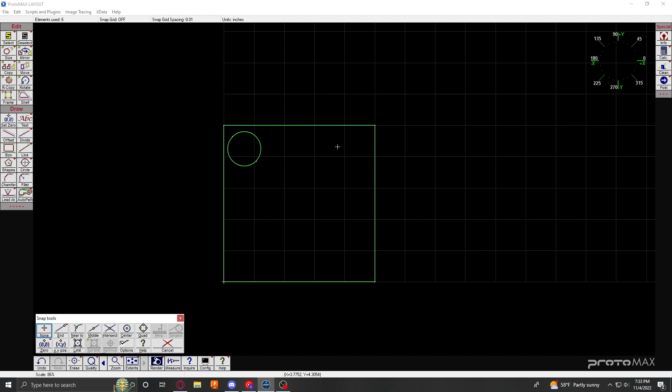How about 4? Okay, cool. Well, that's ugly, not very much use to us, especially in the field. These two circles aren't even inside the square. Let's get rid of those and do this the right way.

To get our circles actually centered where we want, if we want a square hole pattern, we need to create reference geometry. So I'm going to create another square in open space, drawing it here.

I pressed B on the keyboard for the box tool. I'm going to click and create a box that I want to be 4 by 4, so our circle pattern ends up being 4x4.

To get those circles, I'm going to click on the circle tool, and click end to snap the center of that circle to this corner. We're going to draw this for, let's say, 3/8 hardware.

So let's upsize it to 0.4, so there's a little bit of leeway. The decimal equivalent of 3/8 fractional to decimal is 0.375, but we're going to upsize it for leeway.

If you're using a plasma cutter, you need to upsize it anyway. It cuts a little off dimensions, and sometimes the holes aren't exactly circular, so upsize a little. If you're using a laser cutter, do this anyway so you have a little play, since the washer will cover the hole. Upsize to 0.4 or 0.45, or if using 1/2 inch hardware, cut at 0.55, whatever you want. For now, let's do 0.4.

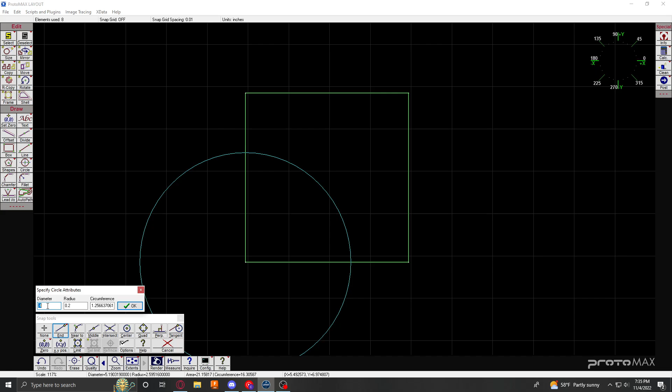So we set that diameter in there. We're going to hit OK, and we've got that there.

For the rest of these, I'm going to use keyboard tools and watch how fast it goes if you're not clicking. I'll hit C, then E, then click, then hit enter. The program remembers the last diameter or radius I used, so it set all of these to 0.4.

To verify that, we can inquire on one of the arcs, and we get our diameter of 0.4. It ends up being 0.39 repeating - not sure why it shows up like that. Close enough, good enough for the girls I hang out with.

How do we get this square into there? Well, it's simple. We're going to create reference geometry.

We're going to get into the line tool now. It works the same way as the box tool - you click it, click two different points in space, and it creates a line. Very cool, very dandy, but not good enough.

We need to create a line at the middle of this to the middle of the other side, to intersect this square directly in half, essentially.

We're going to do the same thing here, but using the keyboard shortcuts L then M to tell the program I want to start a line from the middle of this line. Let's do perpendicular - we'll do a line perpendicular referencing this line, and we get the same result.

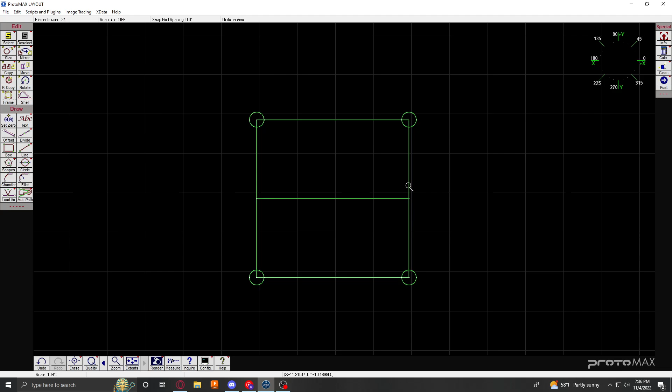Now we're going to use the select tool. We'll click it for now, right click this one, and select the window tool. We're going to create a window using 2 points - click there, click here. We've selected everything here.

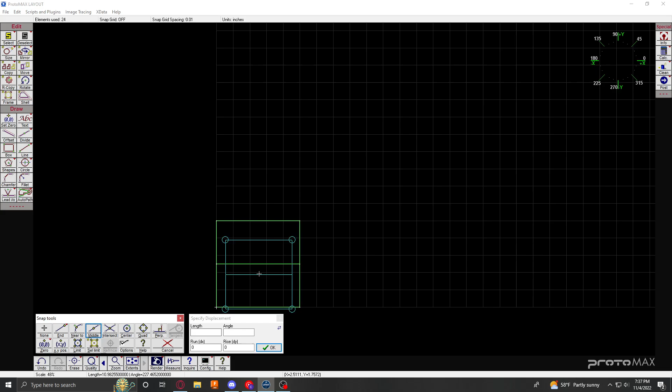We'll use the move tool over here on the left. We're going to move using the same snap tools from the middle of this line to the middle of the other reference geometry line we created. We'll click, and it drops it.

All we have to do now is get rid of all of this reference geometry. To do that, we're going to press E on the keyboard, which changes the cursor to the erase tool, and it starts deleting everything we don't want, since we don't want any reference geometry in the final base plate.

And there we go. We still have our holes selected. We need to unselect those so we don't accidentally delete them in the future.

To do that, we're going to right click the deselect tool and deselect all. Or alternatively, we could just click it to get the deselect cursor - you can see the little minus sign next to the cursor, meaning we're about to deselect everything we click.

This is a time consuming and kind of clunky way to actually deselect everything. So if I want to reselect everything I had, select all. I could deselect just the box by pressing D and C for deselecting connected, and deselect that, whatever. The deselect menu, when you right click on it, has so many different selections.

Same thing with the select tool—it's all the same, but you either select or deselect, whatever. So let's center back here, and we're home base.

Good to go. Let's fancy this bracket up a little bit. Let's get a fillet going on these corners, round them off a little bit. To do that, we'll click the fillet tool, or F on the keyboard brings us to that.

0.375 is about what we want, and the reason for that is it's contiguous with the diameter of the holes that we've set—we've set these for 3/8 hardware, and just to keep consistent, we'll do a 3/8 fillet on all of the corners. We could do 0.25 too. It doesn't really matter. Let's just do 0.25.

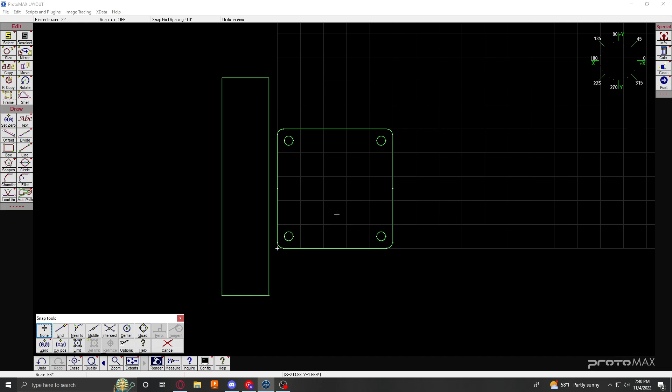If the fence post was right up against, right in the center, you'd have a hard time welding all the way around it. I know I would—I mean, depending on what it was. But this is an arbitrary situation that we're just creating for the sake of getting a little more explanation on how this program works.

So what we're going to do is offset the fence posts off of the edge here. We have an entity that's left over from when we drew that middle reference geometry line. We're actually going to use that to our advantage. We know that that line is in the exact center of the base plate even after we filleted it.

So let's just say we want an offset of 1.5 inches. To do that, we're going to draw a line by clicking L, or clicking line here, from the end of this entity. We get a dialog box to specify the dimensions of that line. Using the degree wheel here at the top, we know which degree measurement we need to input to get the line to go a certain direction. In this case, I know I want the line length to be 1.5 at 180 degrees to get it to go off to the left here. I'll hit OK, and it creates that line for me.

We're going to create another box. Let's just say we're using 1.5 tubing for our fence post. So we're going to create another box using the same constraints as before by typing in 1.5 and 1.5 for the width and the height.

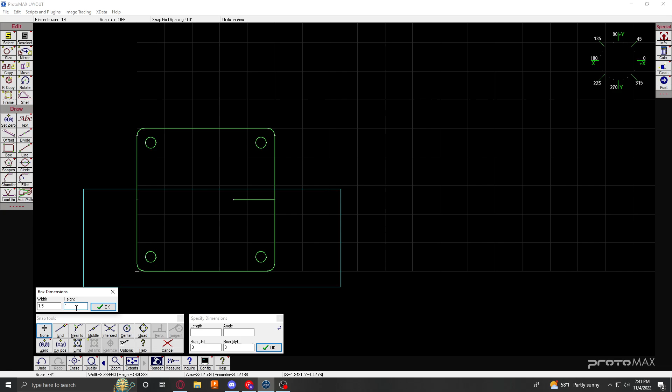Hit OK. Create our reference geometry here by L, M, click to get our line to be in the middle of this square. We're going to select everything by pressing S on the keyboard, W on the keyboard to get select window. Select everything here. Move—we'll just click it here—then select middle instead of putting it on the keyboard, and we'll hit End on the dialog box or E on the keyboard to get it to be on the end of that line. Delete our reference geometry, and now we have the placement here.

Now this makes it so there's no guessing where this fence base plate goes. You plunk it right into that hole, and it's perfect.

So now I'm quickly going to show off here. That took a while, but I'm going to show you guys how quick this can be when you're setting something like this up. I don't know how long it's going to take me, actually—I'm going to guess less than 30 seconds to draw everything just as I drew it. I say it's a show-off, but it's really just to show you guys how quick and easy this program is. So let's go through that real quick.

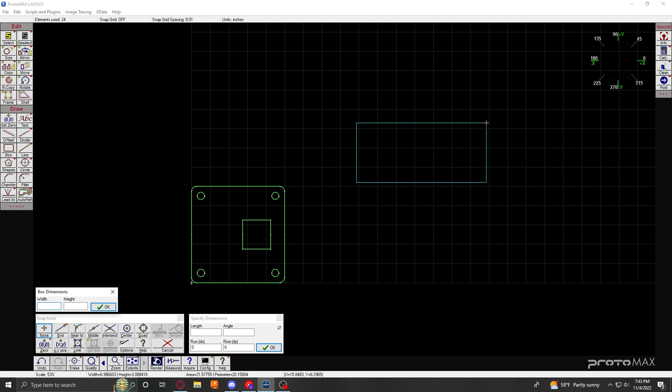Create box at 5, 5—there's that. I'm going to draw another box that is 4, 4. Circles at the end of each one of those at 0.4.

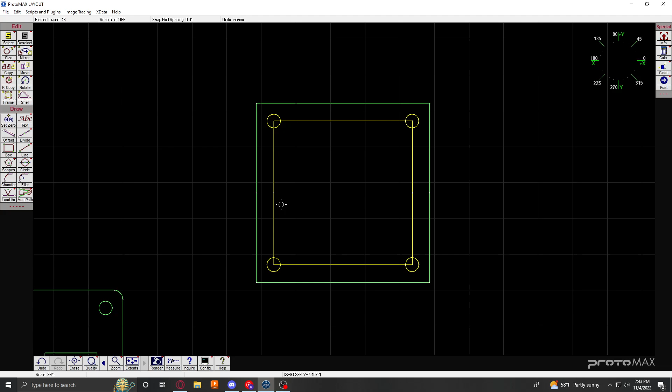Do that, that, and that. Line from the middle of that to the middle of that. Select all, move from the middle of that to the middle of that. Deselect all my reference geometry and get rid of all of that. Sometimes it intersects weird, get rid of that. Fillet that, 0.25. Cool, cool, cool.

I need my line from the end of that, so I'm going to do 1.5 off at 180, right? Yep, 180, there we go. Create another box that is 1.5 by 1.5.

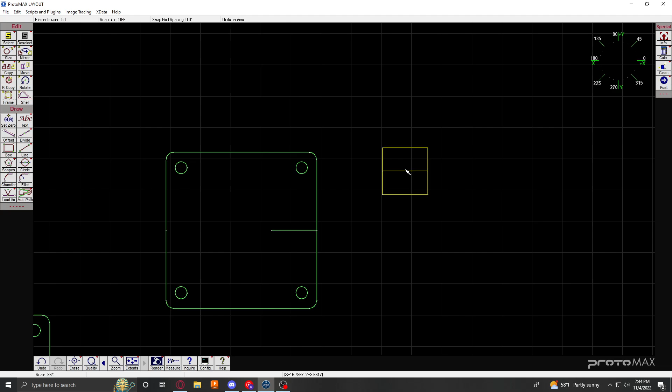Create that, line from the middle of that. I need to be careful because I still have my circles selected. If I were to select this and move it from the middle of that, it grabs the circles as well. Don't want that. So I'm going to deselect window, or actually go back to where they were selected, and get rid of those. This box is still selected. Move to the middle, move that to the middle of this, to the end of this line, get rid of that.

There we go, an exact copy. If I were to take all this, move it from the center of this circle—oops, move it from the center of this circle, center of that. Couldn't even tell, there's overlapping entities, but we can get rid of that quite easily. So that didn't take very long at all.

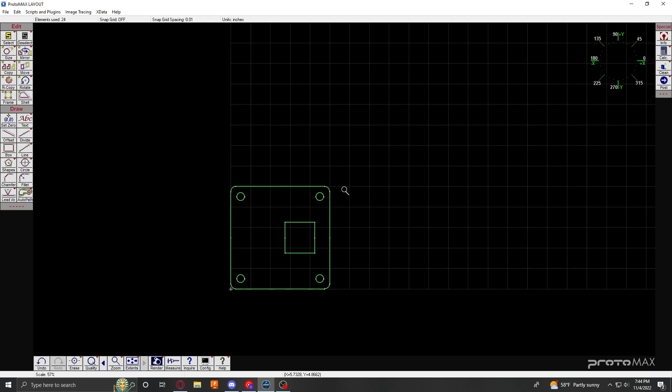I wasn't counting, I'm just showing you guys how quickly it can be to work with this program for something as simple as a fence base plate.

In the future, we're going to go over more complicated things like putting brake lines, brake reliefs, how to account for the tooling that the press brake uses, especially if you're sending out the part or file to be cut out and bent by a place whose capabilities you don't know. We're going to account for that. We'll go over more complicated geometries and XY positioning and placements. We'll make a bumper bracket coming up—I'm going to be building a bumper for a third generation 4Runner from '96 to 2002, so we'll make a bracket for that.

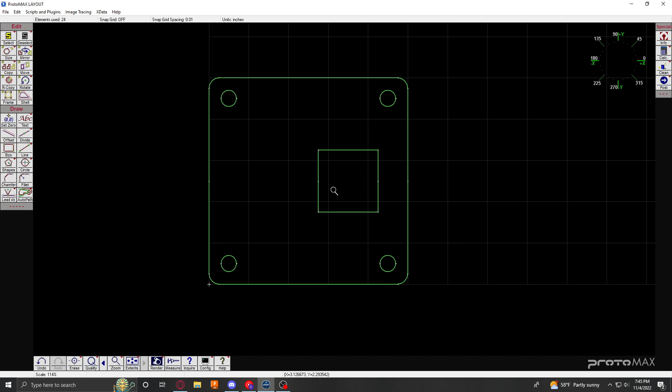I'll show you how I measure it, how I go from real life measurements to a computer drawing and to actual cutout material. For now, I hope that this quick tutorial was good enough. I'm probably pretty bad at tutorials like this, but I'm hoping you guys at least get an idea of

how we do what we do and how simple this program can be. There's so many different tools to this program, hopefully we'll go over all of them, including one like this, the copy tool. So I'll select everything here.

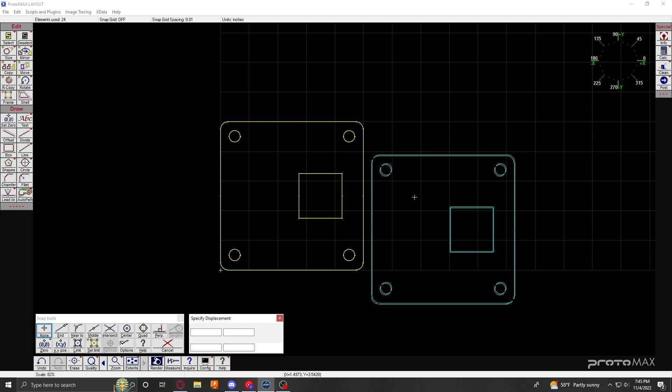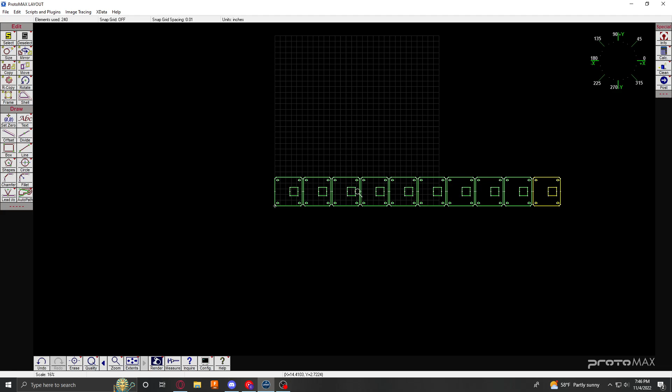I know my dimension is 5 by 5, so I'm going to copy this at a displacement copy line of 5.25, and setting it like this means there's going to be 0.25 spacing, so a quarter inch between each base plate. I'll hit OK, and it's going to pop up an additional dialog box. I want 10 total, so 9 additional copies, and now I'm ready to cut out 10 of these and make my base plate.

I'd probably want to center the square for the rest of these, because this one was up against the wall—just as an example, but super easy.

Or I can select everything, mirror everything on the y-axis using this entity right here, move everything 0.25 at 90, and there we go—we've got 2 rows of base plates in case I'm making a super long fence. This is just showing off what this program is capable of.

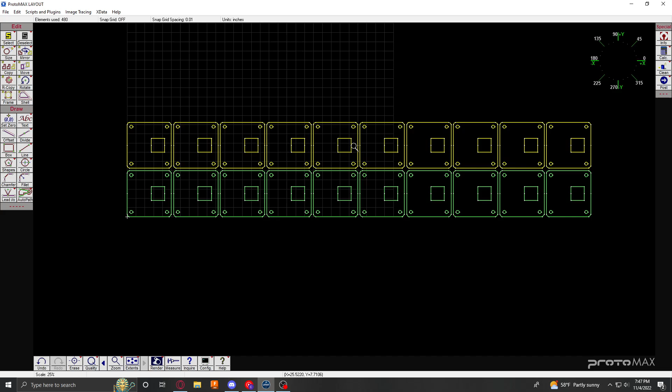I hope that this video and the future ones in this series empower you guys to make your own parts and send them out. Or maybe you've got your own plasma cutter and you're able to mess around with things. We'll do an artwork video, we'll do the bumper brackets coming up, we'll do artwork, signage, how to render things, how to design and measure—all kinds of things. There's so many things I want to show you guys so that you can make your own parts, brackets, fixtures, whatever you want.